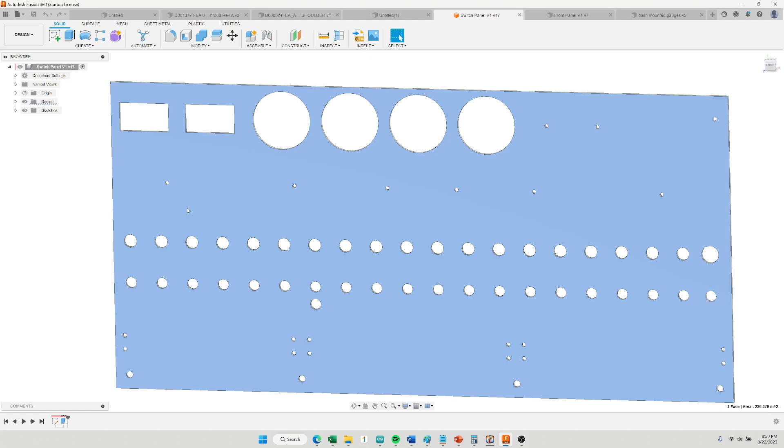We were at the shop looking at the car, figuring out what's left to do and seeing if there's anything difficult or stuff we've got to wait on. Really the hardest thing left is the electrical, and we've already got like 90-something percent of the parts. But here's what we didn't have: we didn't really have our switch panel, our gauges, that type of stuff. We have gauges, we have switches, but we hadn't figured out where these things are going to go, how they're going to be connected. So let me show you how we're going to do this.

When you're sitting in the driver's seat, since there's no passenger seat because it's a race car, this panel is going to be somewhere in access of the driver, probably on the passenger side. That way you could reach over, twist your body a little bit, and all your switches and stuff would be right there. So let me show you basically what this is going to be.

In the top left here, you can see this section. We're going to have two different LCDs. The one on the left will be your battery voltage, and the one on the right will be your amps.

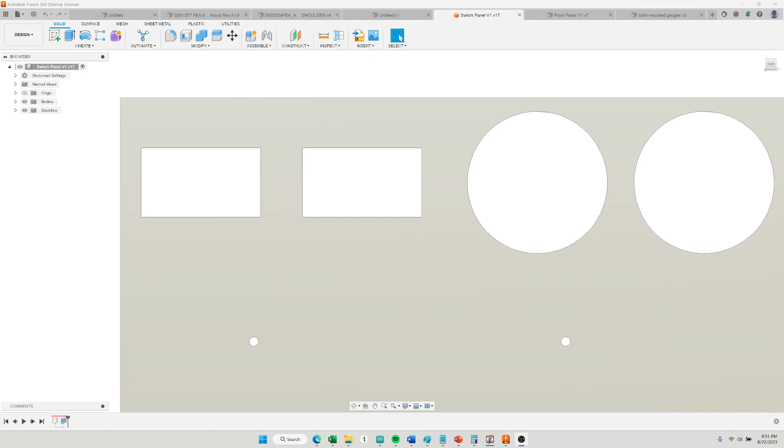So this left one here, that's your voltage, and this one right here, that's your battery amps. Now battery amps aren't super common, but I've always wanted that, and I've appreciated it in other industrial equipment and stuff. Being able to see your amps is kind of nice - you can tell just from seeing volts and amps, but specifically amps.

For example, anytime you turn something on, it pulls amps. So you can just be staring at your amp meter when you flip something on. That way, say you flip a switch and your fan was supposed to turn on, but it didn't - if it didn't turn on, it's not going to be pulling any amps. So it's a dead giveaway something's wrong.

On a race car or a big piece of industrial equipment, you may not hear a little pump or fan or rear tail light or whatever, you know what I mean? So say if I flip my rear tail lights on and they normally pull 1 amp - I can't see them without getting out of the car, but I could see the current draw on my meter. So it's a nice thing to have.

Gauges - I'll be honest, I don't remember what these are. We're going to have some other panels we'll go over in a minute. These are specifically stuff you would look at before a race or maybe after a race, but not during a race. That's why they're not in the field of view of the driver when seated looking through the windshield. This would be stuff like engine temperature, trans temps, oil temps - stuff that doesn't really change in the course of a few seconds, but you would want to know. That's what these gauges will be.

Let's hit the big stuff, I'll come back to the little stuff. You see this giant row going across here, right? There's this huge row going across there, and another row right below it - that probably shows up on video a lot better. This top row, these are switches - there's going to be a row of a ton of switches. These are all super heavy duty - I don't have a picture of it right now, but these switches are rated at 50 amps a piece. So we're actually skipping the relays and just running the power right through the switch, but it's all heavy duty, so it'll work.

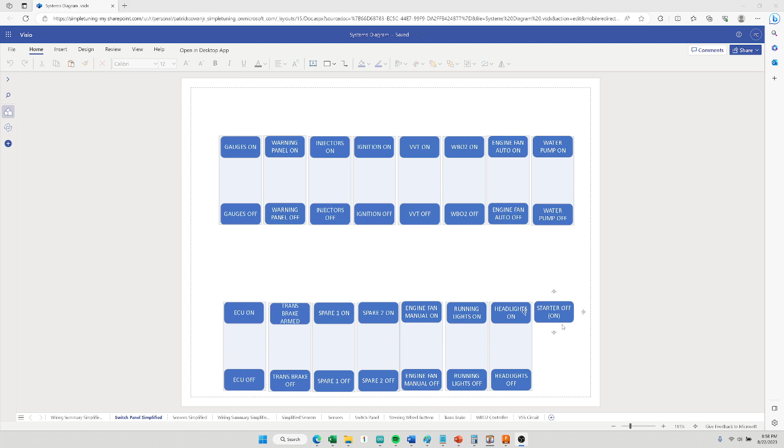A couple of spares. We ended up adding some more, so we got at least 4 or 5 of these. Here's our engine fan manual, so you can just manually turn the fan on for extra cooling, running lights, headlights, and that's our starter push button. So that's our switches.

A couple things worth noting. Up here in the top, you'll see these 2 holes. This is a solid state relay, for the trans brake, to be able to bump in, you can do some cool stuff with a standalone where you can PWM your trans brake solenoid and it'll allow you to bump in really nice, but you need a solid state relay to do that.

These 2 holes, that's what those are for. And then this one hole over here, that's for a relay that I purchased, used for the automatic fan control. Sorry I don't have pictures of it, I'll show you later. It's kind of boring, but it's just a big fat relay. It actually says China on it, which makes me feel bad.

But to tell you the truth, I bought this from one of the most reputable, expensive wiring companies in the world, and it's rated for 80 amps continuous in automotive environment. So I think it's going to be fine. It also has spade terminals, but they're 3/8 of an inch wide, on the switching side. They're humongous, so we should be good on that.

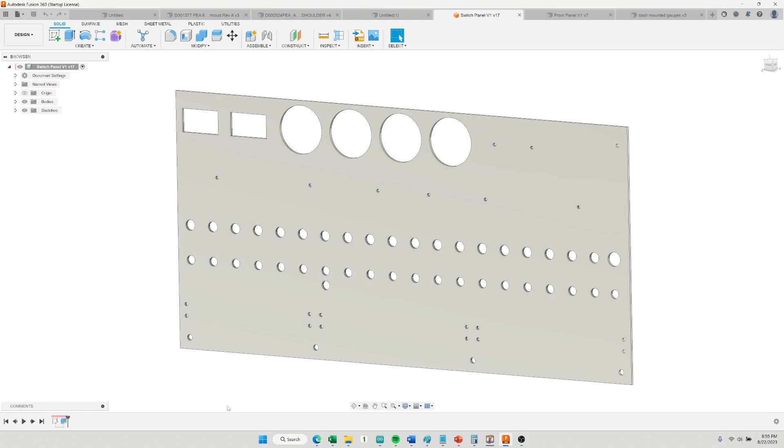Anyway, so that's this panel. This is going to be laser cut, probably out of aluminum, roughly 1/8 inch thick as you can see. These holes on the very bottom are just to bolt some tabs to bolt this to the car or something, I don't really have that 100% figured out. But as you can see, all these little holes are like tap drill size.

So for example, up here, the fuse blocks, or down here, the screw terminals, or the solid state relay, or all this stuff, whatever these holes are, I looked up the tap drill size, and I'm going to buy the taps, and these are going to be laser cut to size, and all I got to do is run a tap through these holes to thread them, and at that point all the holes are in the right spot.

So when this panel gets here, all the parts just go together. You just run the bolts in, really easy. So it should look pretty clean and professional, and it won't have a lot of bolt on one side, nut on the other - nobody likes that. So for the most part, this will be fairly simple.

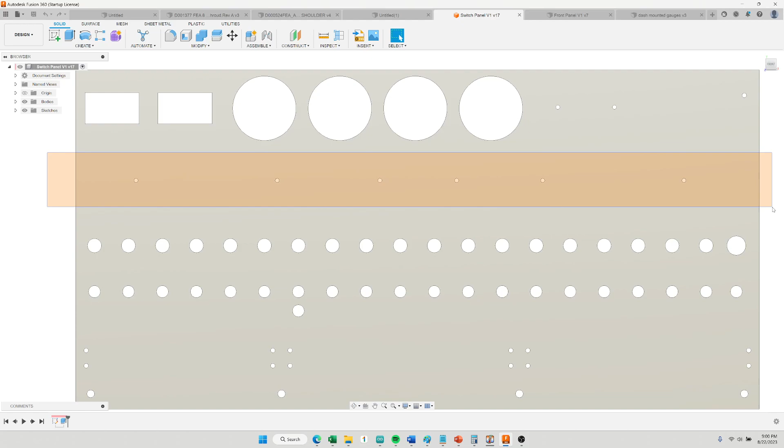Now, one thing some of you may have picked up on, I didn't mention it, but I've worked on this a lot. One of the things I accomplished is if you look at this row here, this section is where power comes in - this is your fuse panel and distribution. Once power comes out there, it goes through the switches, and then once it comes out of the switches, it crosses through the lamps so you can see if you got power, and then after that it goes to the screw terminals.

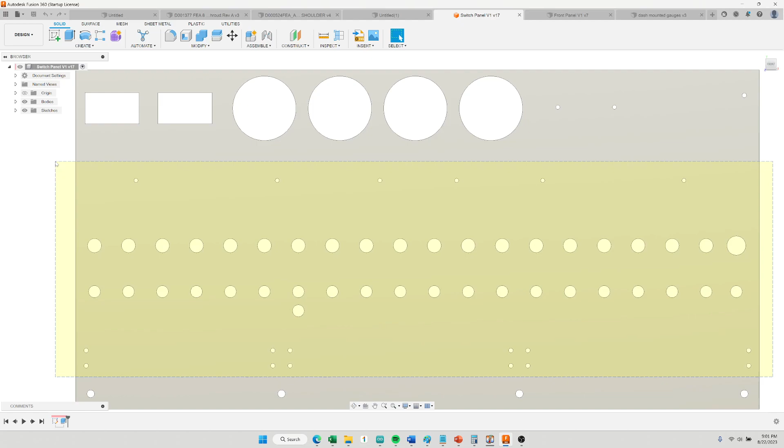Now, what you probably noticed if you were paying attention is the flow of this - nothing is crisscrossing. Power moves from the top to the bottom. So from a wiring perspective, all the wires will just kind of naturally flow down, and that makes running wiring a little bit more efficient. The wires will be shorter and they won't be crisscrossing everything all the time. So I tried to keep that in consideration.

I ended up at first, for example, having the switches towards the top and the lamps above that, and then I had the screw terminals at the bottom, and then I wanted to put gauges, and I put them at the bottom and then at the top - this is actually the 17th revision to this panel. So that's a little embarrassing, but I'm actually pretty happy with the way it is now. I wouldn't regret building it just as you see it, and that's probably what we're going to do. Now, we're not going to build this.

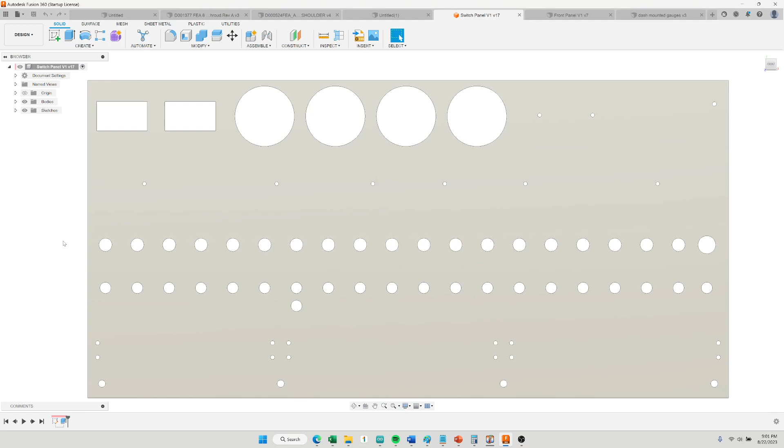We're going to get it laser cut because that's faster and cheaper. But okay, that panel—this video is kind of running on, but I'm going to quickly run through another one.

For anybody that's interested, what you see here is another panel. This one is going to go where your dash, like your gauge cluster, would normally go. So this is going to be a warning panel.

I could do a whole video about the details of this, but essentially right here, this big giant one is right in your field of view. When you're looking straight ahead, this light would be directly below your line of sight. This is a big green lamp. This should always be on when you're ready to race.

So this is a warning system. This requires a computer, software, sensors—I'll go into that later. But essentially, when you're driving, if you're ready to race, that light should be green.

All this other stuff would be off. Now each one of these up and down pairs go together. So right here at the top, this would be a row of red lights. Below that, you would have a row of yellow lights. That way it's easier to see a warning from a caution.

Now these would be things like oil pressure, coolant pressure, fuel pressure, critical stuff like air-fuel ratio. I don't really remember all the things because I don't have the papers in front of me, but you get the idea—a whole bunch of systems, so all the critical stuff that you would actually care about knowing when you're racing has warning indicators.

So this gives you peace of mind, and you can enjoy driving the car, and you're not like, oh, I wonder if this, oh, I wonder if that. It's like, nope, I got a green light. I know everything's good. All the critical stuff's being monitored.

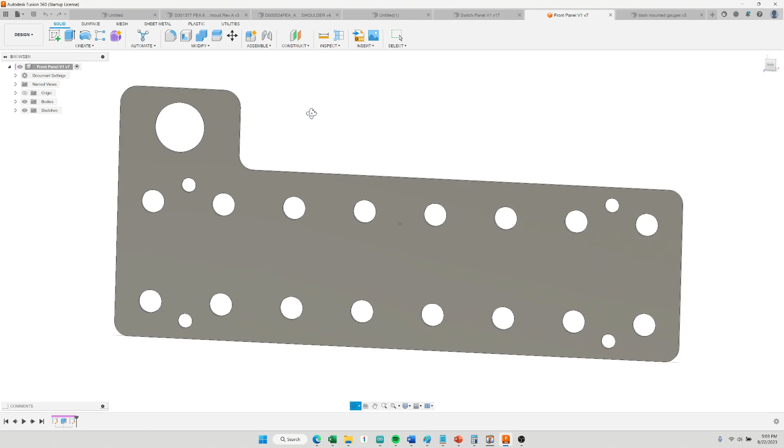This one's pretty simple, so y'all can probably guess what this is for. This is for gauges. Now the wideband we're running is called Ballenger Motorsports AFR500 version 2. This guy's specifically set up with a high accuracy sensor, and it's calibrated for methanol. So it's a little goofy.

That's what this rectangle one's for—it's like a weird shape. It's got the controller and the display all built together. I wish it was a round gauge because it would be easier to install, but at least the display is kind of big, so that's nice. So it's going to go in that slot.

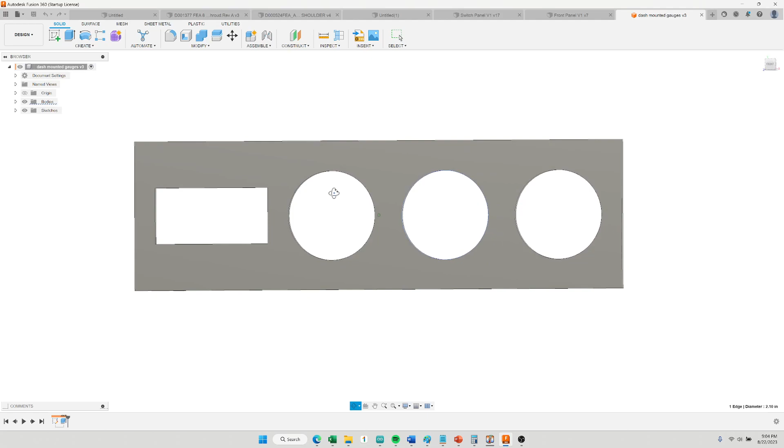These last three are things that you might actually want to look at when you're racing. So this is going to be like oil pressure, probably fuel pressure, and boost, something like that. I don't really remember—I only put three, so I don't remember what they were. But somewhere I came up with the three that I thought were important and put that there. Maybe I need a fourth one. Maybe we'll do that. But anyway, that's this panel.

Again, getting laser cut. Looks like I forgot to put some mounting holes in it, so we'll do that before we order it. But I wanted to show you guys this. This is kind of like some work you do up front, but then when it's actually time to wire the car, having stuff like this already designed and built just makes everything go together easier.

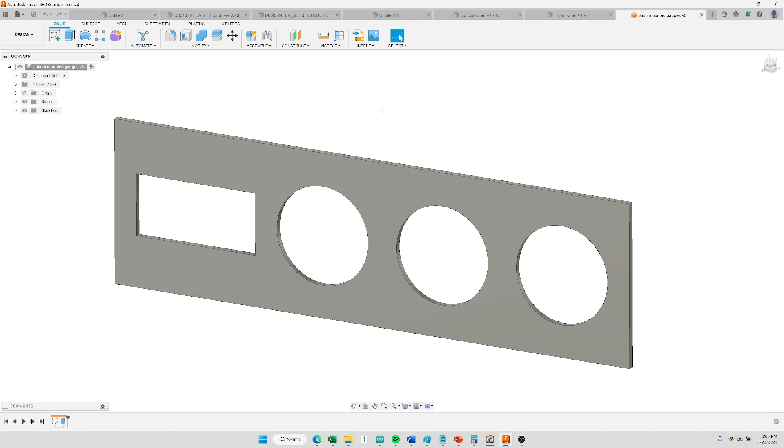So we're going to finish up some mounting holes on this, maybe add a fourth gauge if we think we need it, and get this order placed because I need to get these panels.